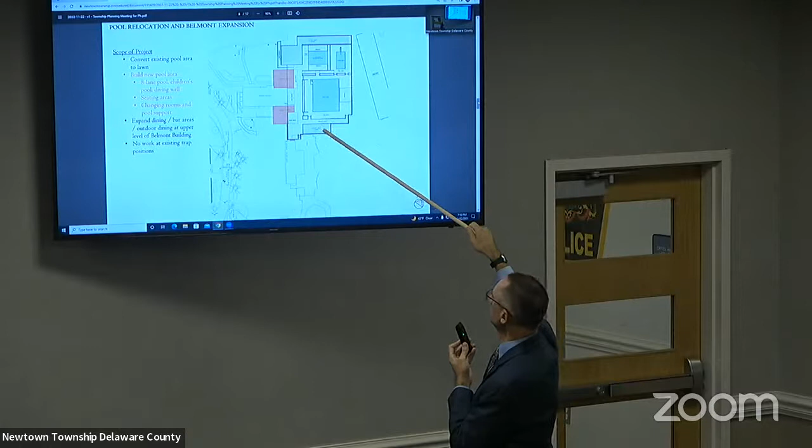In addition, there is a hardscaped area around, some roofed pergola areas as part of that, and then some green area in the immediate vicinity.

And then the various types of support facilities you would typically have with a pool, a small snack bar, changing rooms, office for the staff.

The Belmont building is a 2-level building, so this pool is at the lower level. At the main level or upper level, if you could go to the next slide.

We're putting on small wing additions to provide some additional dining and bar facilities as well as outdoor terraces. And then the area over here where the trap shooting is will be untouched.

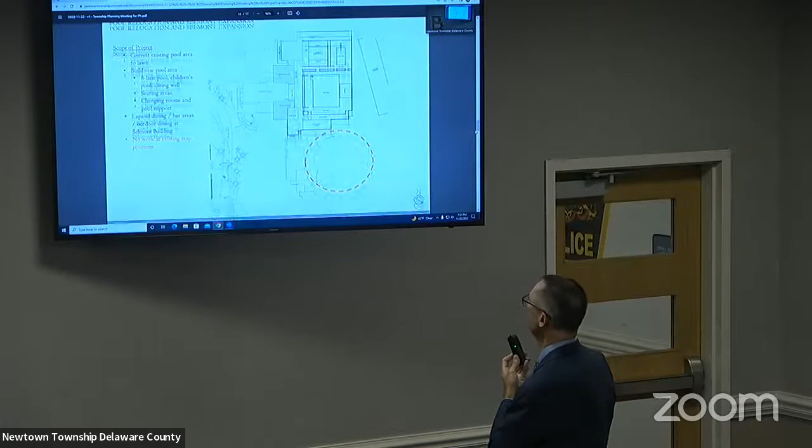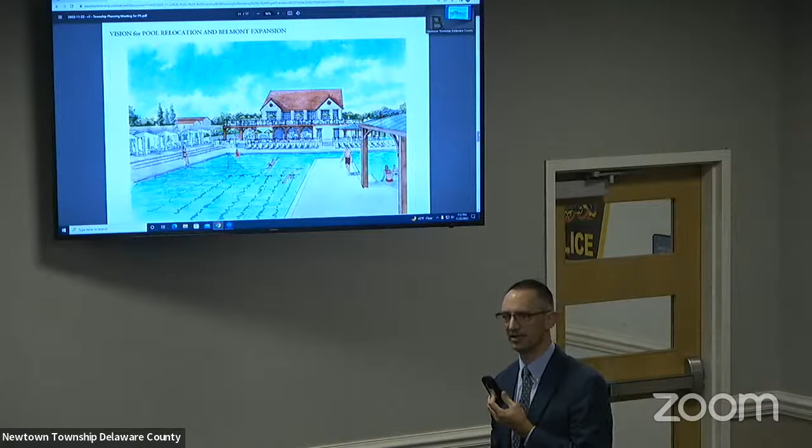Moving to the next portion of the project. Before I do that, this is just an early rendering done of the facility, to give a general vision for what is very much in keeping with the nature of the building that's there and the club's facilities. This was an earlier version - the pool is actually rotated 90 degrees from what you're seeing on this rendering, for those squinting carefully at the plans trying to figure out why this looks different.

Okay, the next image takes us over to the courts area. So you see currently they have a number of tennis courts and platform tennis courts. Go to the next image.

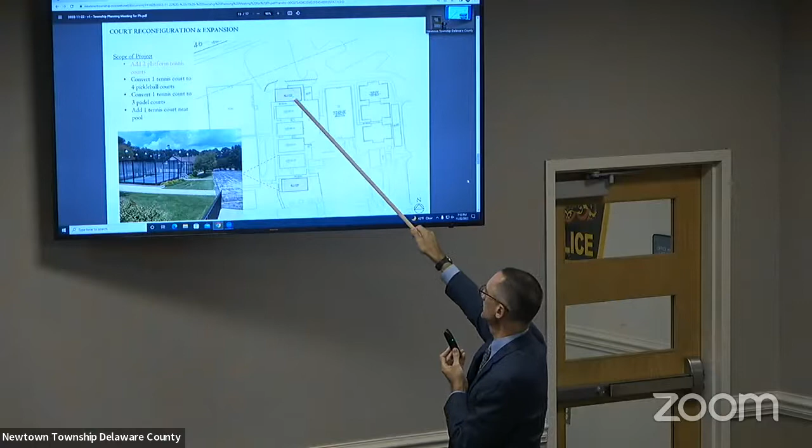So this scope includes adding 2 platform tennis courts. One is in the grass area to the north of the existing. The second one goes into the parking lot area. If you go back one slide, you'll see it's in this zone right here.

So this is kind of a weak connection between these two levels of parking with just a little drive connection. We still would have the ability for people to come in and loop around here or loop around here. We just would be lacking the connection between those two parking lots now.

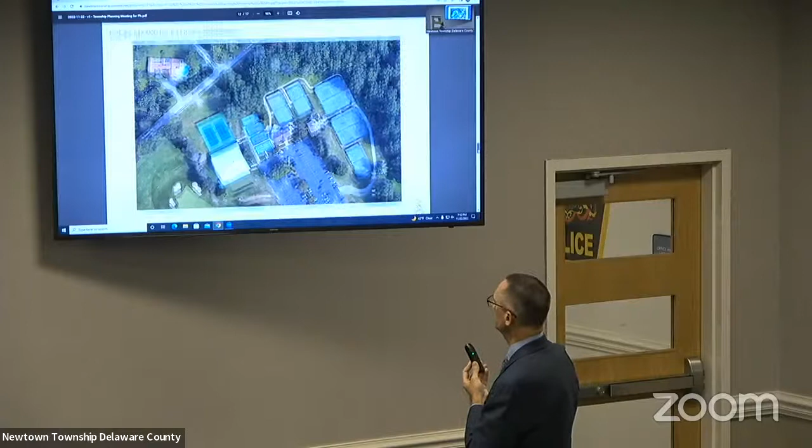This image is just showing that location where this new court would be added over here. One of the existing tennis courts will be converted into pickleball.

Pickleball is a much smaller court. You can actually fit 4 pickleball courts onto the size of 1 tennis court. So we'll just work with that existing paved area.

Then the adjacent tennis court will be converted into padel. Padel is a newer sport and not a lot of people have heard of it. It's kind of like a combination of tennis and squash, for lack of a better term - you can play the ball off the walls, all the rage. This will require some expansion of the existing paving in that area, but basically is in the location of 1 tennis court.

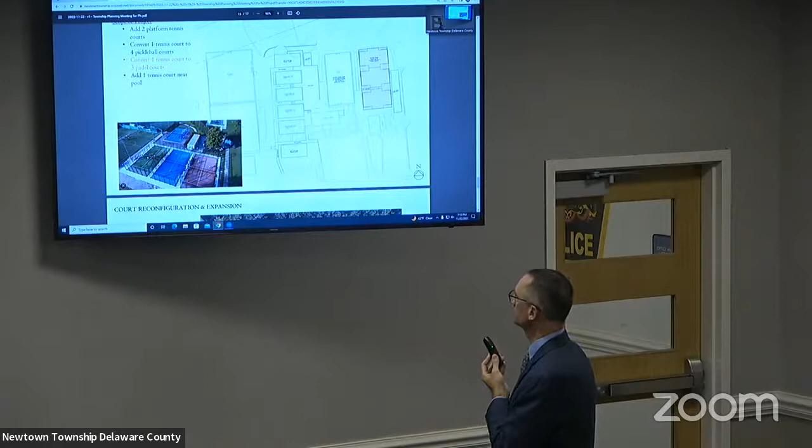Finally, to make up for the loss of the 2 tennis courts, we would be building 1 additional tennis court. Right now there's a single tennis court in this area; we'll just add additional court surface there to make it a double court similar to the others that are there.

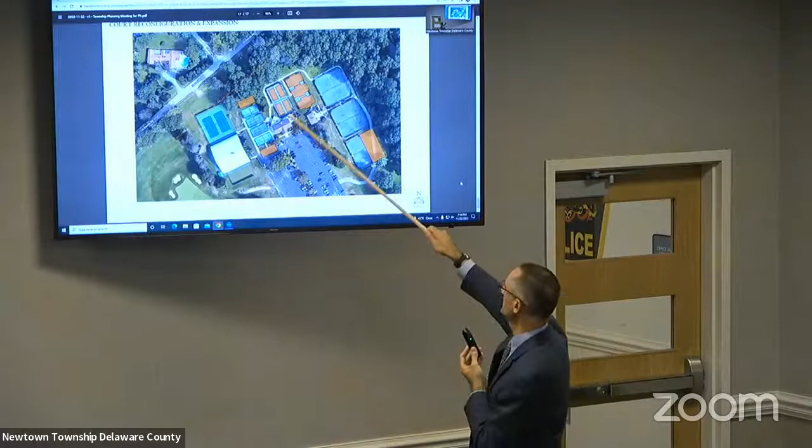We go to the last image then. This gives just an overall summary of the different changes to the rackets area. That's part of the project, and that is the 30,000-foot view of the phase 2 project.

Will you be adding any parking where you're putting in the paddle? The parking count, I think, is above. We're still well above. How many spaces? Probably 12 or something like that. All the numbers are close to that area.

Does the green area you're creating where the existing pools are being removed have any designated use, or just open space? It might be used for an occasional event, but it's basically just an open lawn area. Part of the reason for the relocation is creating a better visual connection between the banquets area of the clubhouse.

To the valley below. What is the total disturbed area, basically? Roughly, total disturbed area, that's you. Yeah, I don't know, don't quote me, but I think it's...

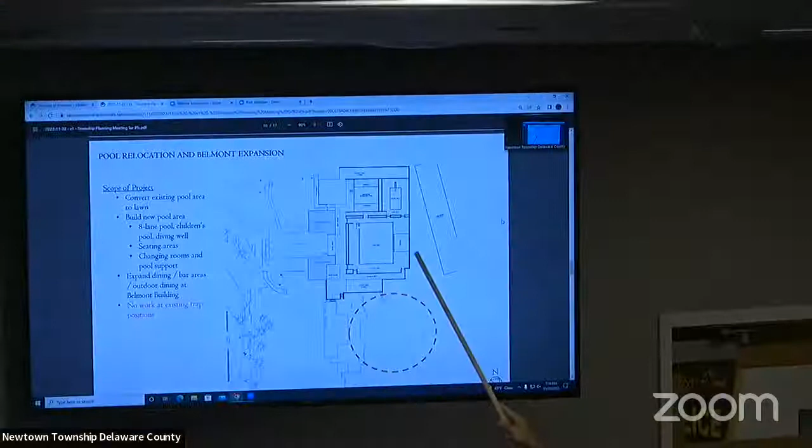What's interesting is the topography of the site. The site actually starts to drop away from this area going downhill to the east. As a result, this whole area you see in the darker line is on an elevated level. So as this land drops away, we're going to have a railing around this whole area, so there'll be a pretty distinct differentiation between the two.

2 feet, 3 feet, 4 feet? More -- by the time we get down to here, we're probably in the 10 to 11 foot range.

Basically, we'll have an above ground pool. Right. They may not love the sound, but I guess it's there today anyway.

Anybody have any other comments? Andy, do you have any comments? You looking at it? No, anything? Eric and I did have a brief moment to talk about the potential need for a conditional use because of some stormwater management facilities that are shown located in the steep slopes.

The only other thing that I would add is, I know in accordance with the building code, recreational facilities have to still meet accessibility requirements. So I assume that's all been accounted for.

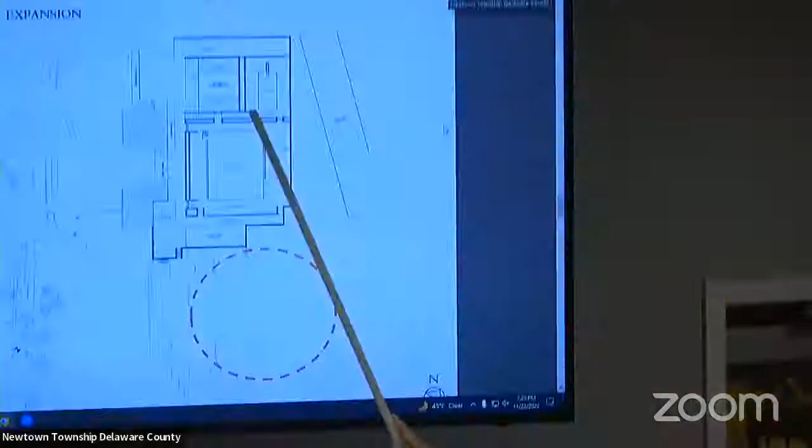It's a little tough to see here, but this portion through here is a ramp that connects the pool level. So from here to here is down about 1.5 feet, and from here to here is down another 1.5 feet. There's a slope connecting them all.

Any issues with utility connections, water, sewer? Currently, the Belmont building has water and sewer connection. We will actually have to relocate one of the sewer lines because it crosses through one of the pool areas. So that's just something we'll have to do, but we're intending to maintain the connections that the Belmont building has.

And what goes on in the Belmont building? Currently, it has food service on the upper level and a fitness center on the lower level. With this project, the lower level would be used for supporting the pool facilities, a small snack bar, changing rooms, office area, and keep the fitness center as well. And then on the upper level would stay food service, but with just expanded dining facilities. Aronimink has a sizable membership, and they're trying to provide a variety of meal experiences for them.

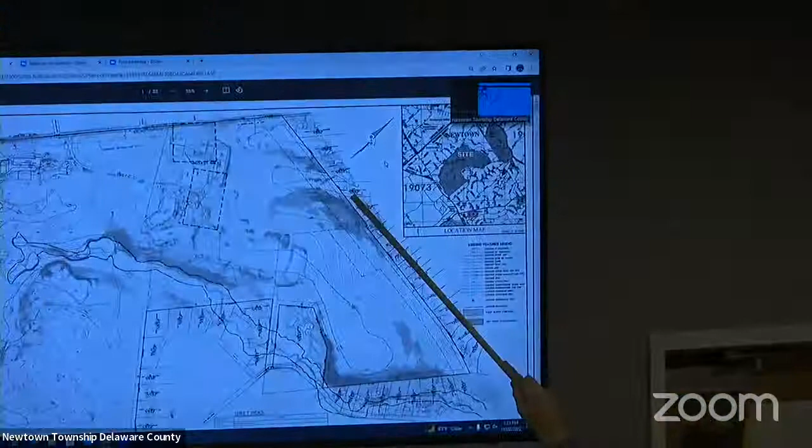When you bring up the site plan, these properties here along Paper Mill Road aren't shown. And my property is actually across the street from Paper Mill Road. Dunminning is way over here, but my property fronts from 33 Dunminning to the back of Paper Mill Road.

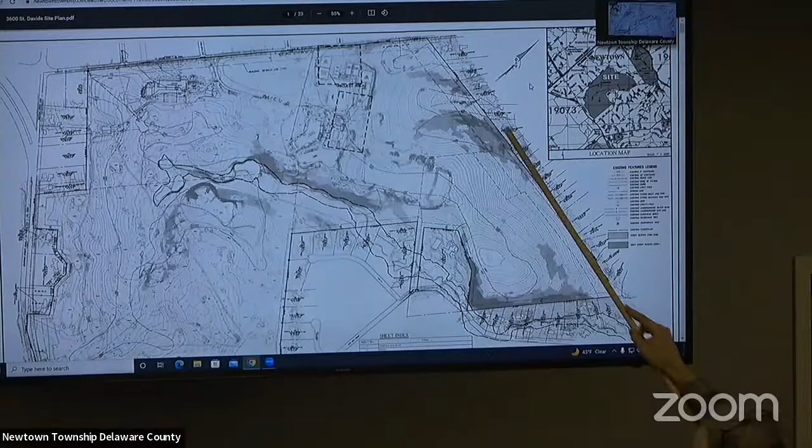If you come off of St. David's and turn onto Paper Mill Road, my property is the one with the two big ponds on your left side. Now, in this area right here, labeled GNB2, all the water collected from rain or groundwater runs down this tiny little creek between numbers 15 and 17 Paper Mill Road and goes under a small culvert to one of my ponds. One of the ponds is about a quarter acre, and then it feeds another pond that's about half an acre, and that in turn feeds Darby Creek.

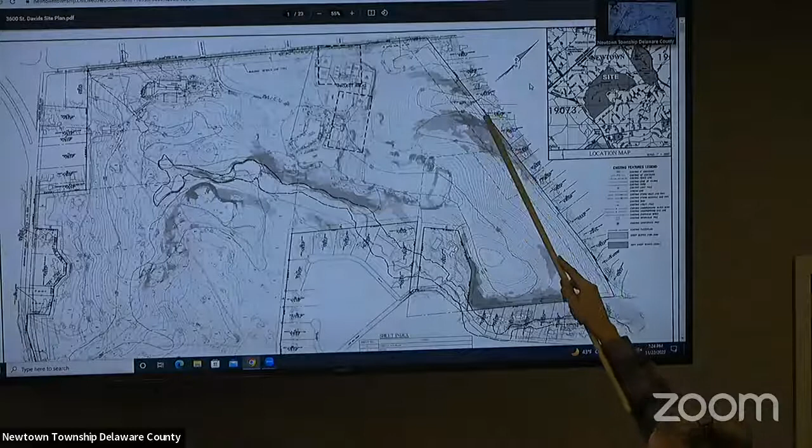So this does not go to Darby Creek like many of the other culverts on that road. It goes to one of my ponds, which contains koi fish and is used by St. Joe's to release turtles that they rescued. Now, the culvert, when it was sized years ago, those two ponds are actually, in a sense, artificial ponds. They have concrete retaining walls and spillways and things like that.

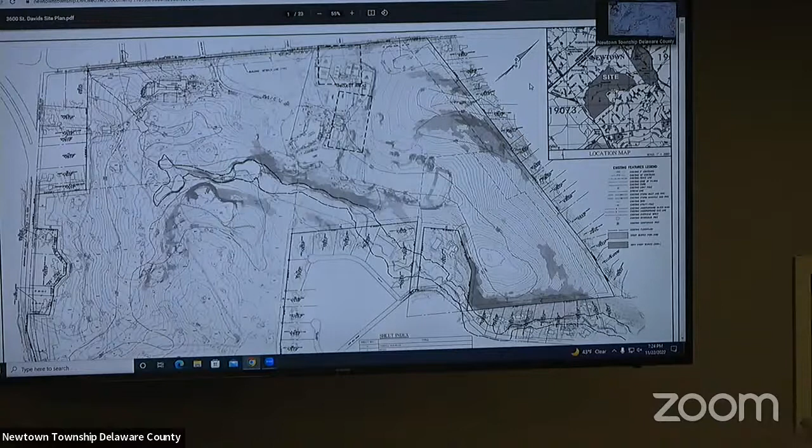When those were sized decades ago, they were sized for the normal groundwater runoff that we were getting and the normal kind of storms that we would have. But as you know, this is part of the whole township issue with the microbursts and more storms. What's happening is I'm getting more and more silt into my ponds.

These are very steep slopes here. Coming through here, if you walk up there, they're starting to etch in, and every 5 or 6 years, I spend 10 grand to have that pond dredged and remove the amount of stuff in it.

What's happened is when we have these 1 in 10 year storms every few years now, the culvert gets clogged up, the water flows up over Paper Mill Road, and then it muds up Paper Mill Road. And I've worked with our Public Works Department. George Sheriff has been great about it, if I see that the culvert is starting to get clogged up, he goes and unclogs it.

What we figured out is that we're at the limit right now for what that little culvert can hold in terms of water. If we get any more water, either rainwater, groundwater, or runoff coming into this zone, it's going to be a mess, not just for me financially having to dredge the pond, but the township has an issue too, especially in the winter. If we get a fast melt or a big storm in the winter, it's happened on Paper Mill Road. When it floods over that culvert and it gets blocked, you have an ice sheet in front of number 15 and 17 Paper Mill.

On what actually shows on the grading plan, basically what we have here, it's a little hard to see, but that's the stormwater management area approved by the township board. What we're showing here is actually a level spreader that takes whatever water is discharged.

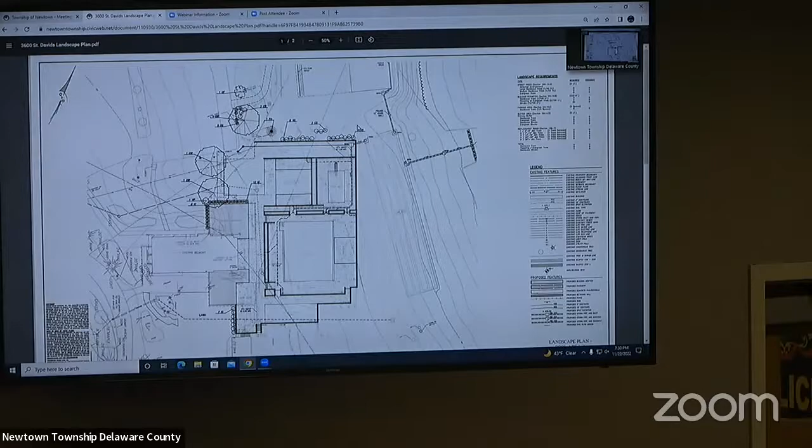What's the length on the level spreader? And my follow-up question is, can you distribute it over a wider area? It would seem that we could do better. We'll certainly take a look at that.

Are the other two culverts you referenced going to be left and right of this as I look at it, or one up top and one below? So if you can move it heading in that direction. I guess the other thing too, we have...

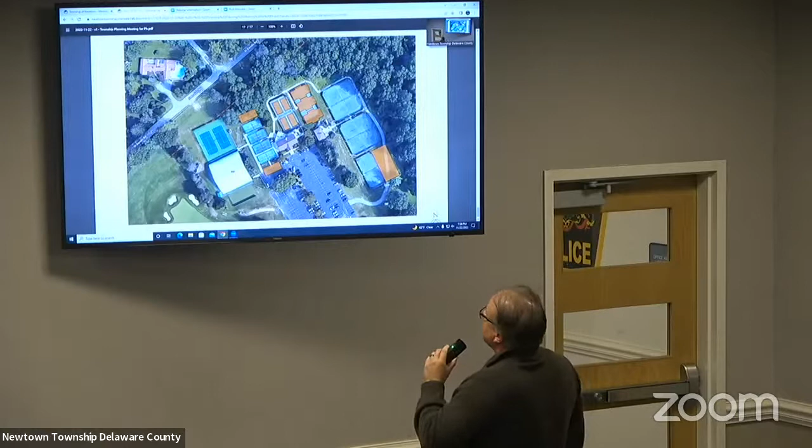What about maintenance for these particular courts, specifically blowing of the courts at 6:37 a.m.? No? I'm asking questions, that's why I came to the event. You tell me. Okay.

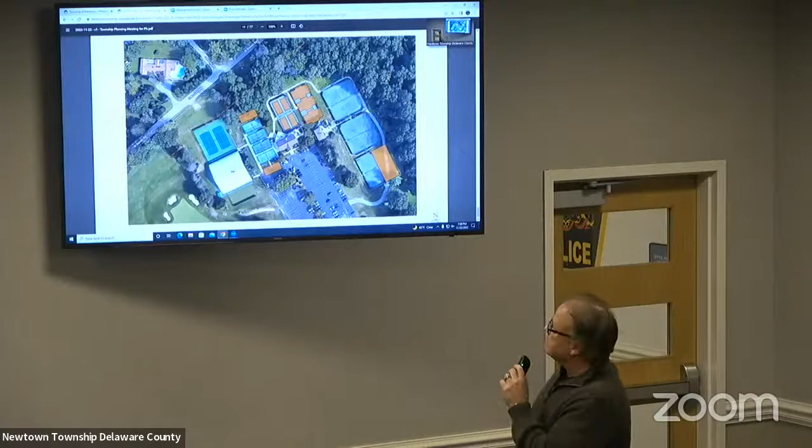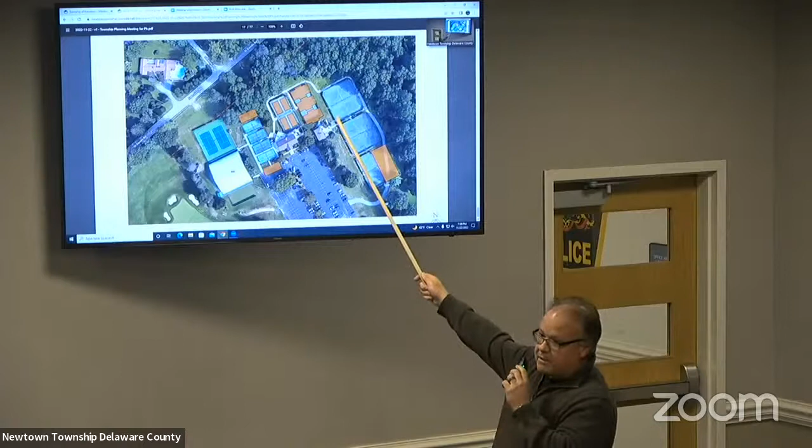Well, the issue we would have would be the time — if there are lights here at night, that they are extinguished. I don't know if there's a township code or some limit, but as a resident, since we have light coming into our house, that's something that not only us but our other neighbors have, that should be considered carefully by the township before erecting lights.

Yeah, the lights in the parking lot are on all night, and I assume that's for security and safety. But our experience has been these lights don't go off at 9 o'clock. I don't know if I'm privy to any township regulation regarding lighting, but I've done this before in Newtown Township, and we were given restrictions for lighting of tennis courts. So I know what we have to abide by at our club, and I just want to ensure the same rules apply to Aronimink that we have to adhere to for our club.

I know they'd have to, yeah. I mean, they gotta. I would say yes, our zoning does provide provisions for outdoor lighting, for tennis courts and stadium lighting. We did it for Marple Newtown High School when they put the new field in — that's an example. So I'm going to go out on a limb and say the applicant will have to provide a lighting illumination plan showing it's consistent with our ordinance as part of this application. And then, prior to us issuing a CO, we would make sure we had a photometric plan that showed it was consistent with what was originally provided.